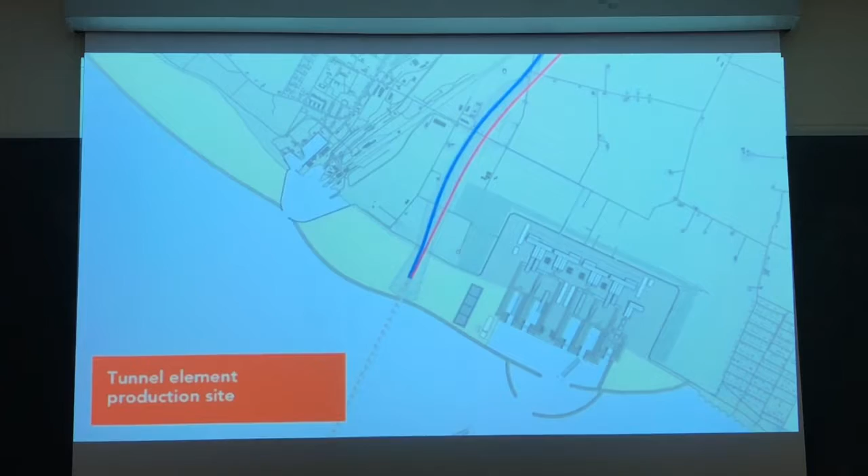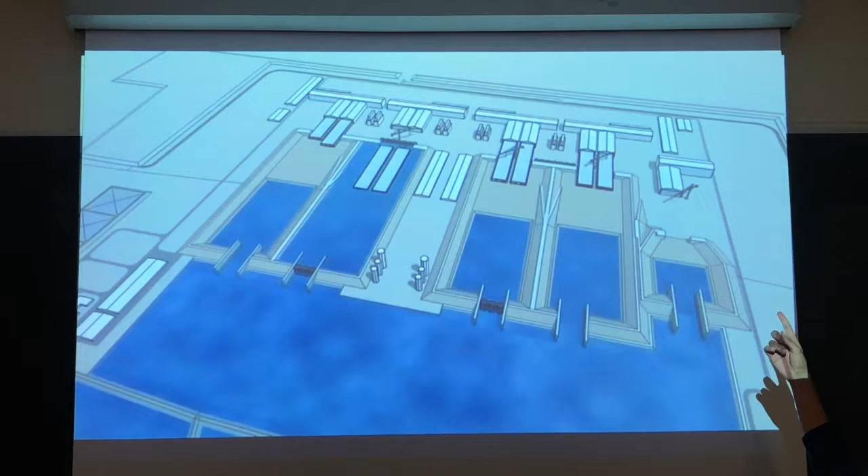My name is Michelle, and today we'll present the topic of immersed tunnel and floating bridge. Starting with the immersed tunnels, the tunnel elements will be produced in a factory near the project location. The animation you see on the screen shows the production site. It includes halls where the reinforced modulars will be prepared, as well as a production line for concrete casting, docks, and a working harbor. My friend Chi will walk you through the construction details.

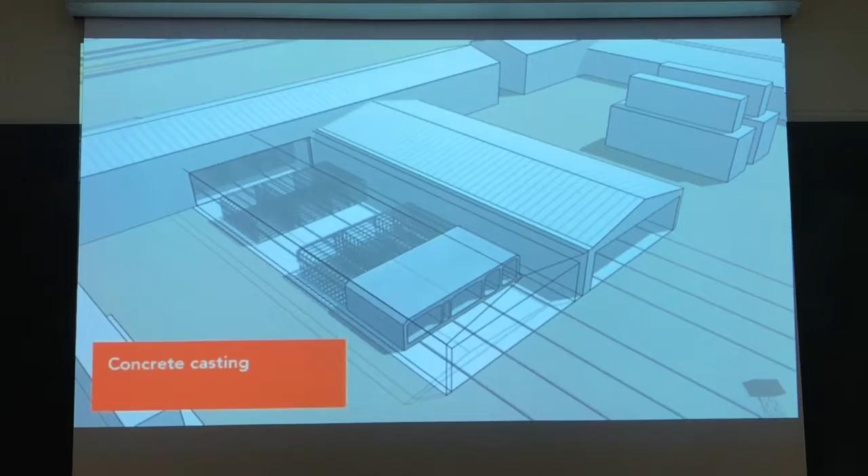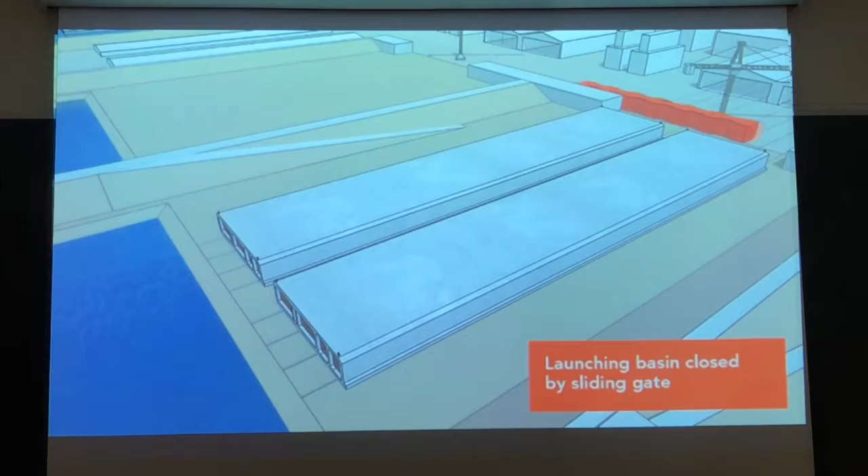Production will take place in a continuous process in which 9 identical segments will be joined together to create a complete element. All reinforcement work will undergo extensive quality controls before moving to the next station. The rebar cage will be skidded to the assembly area supported by both the lifting table and the launch scaffolding system. To prepare transport, watertight bulkheads are mounted.

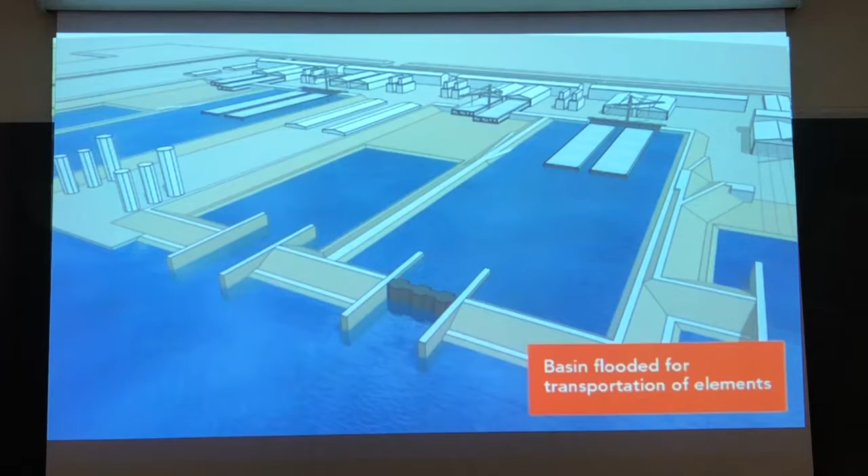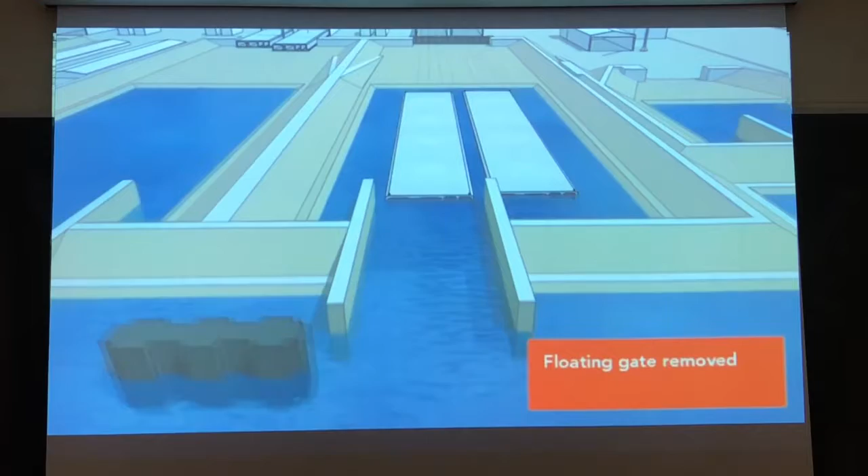After floating a trussed pontoon and closing all gates, the basin will be filled. After aligning the water level, the gate will be removed. Then, the element will be towed out underneath 2 immersion pontoons.

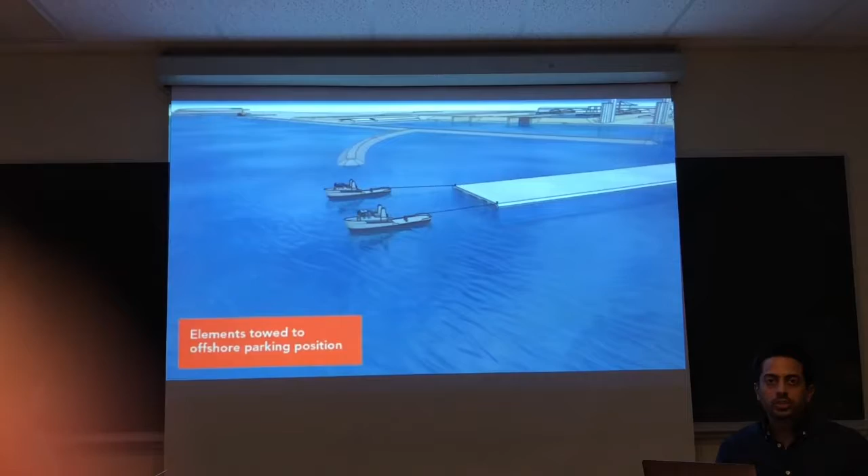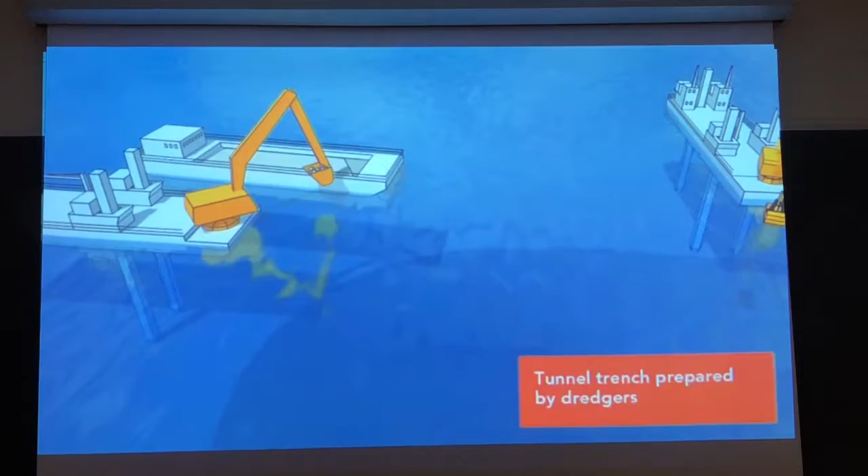So during the construction of the tunnel's elements, dredging will be carried out by specialized dredgers to ensure a precise and smooth base in the tunnel trench. Dredging is being selected to minimize sediment spill and to limit the impact on the surroundings and the environment. Dredged material will be transported on special barges to designated landfill areas.

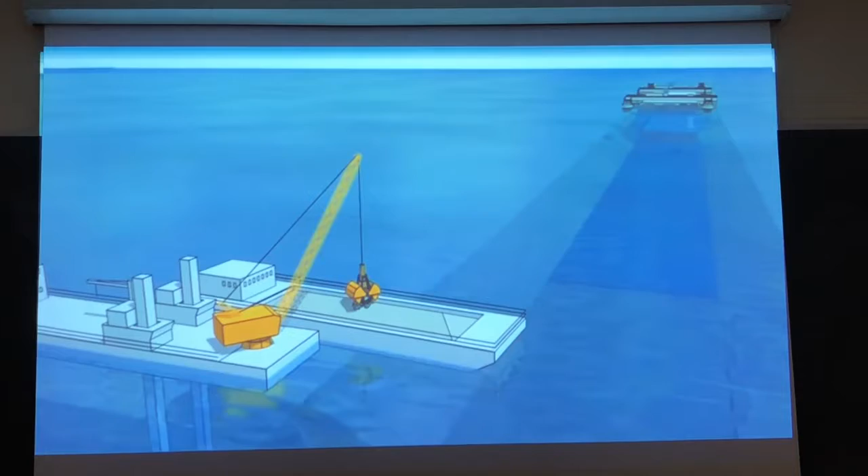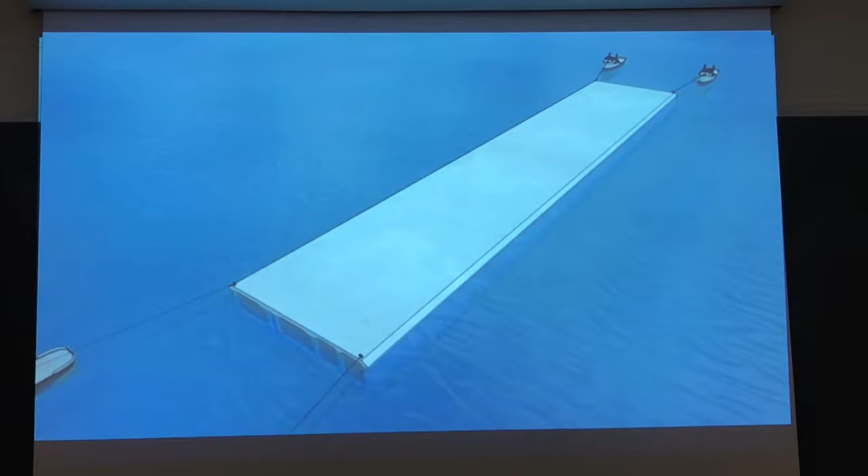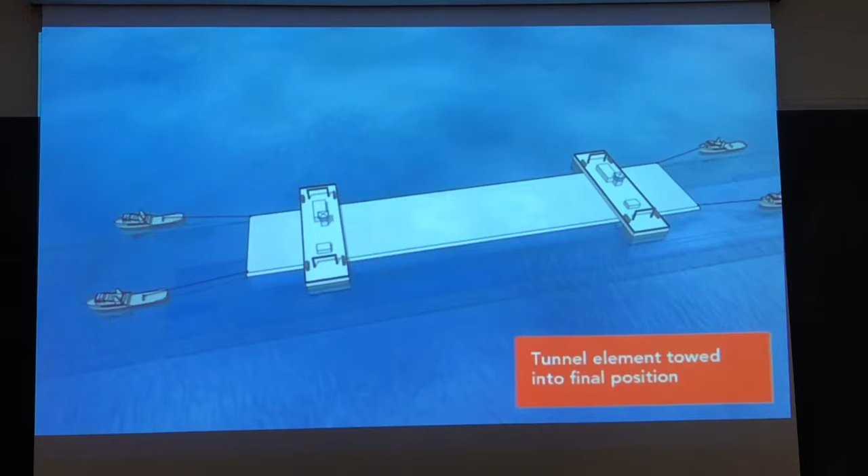After preparing the site, tunnel elements will be towed out to the project location where it will be immersed into its final position. When the element is positioned directly above the area where it will be immersed, it will be held in position by cables attached to temporary anchors in the seabed. It will then be immersed in a trench that has been excavated in advance while the elements were being constructed in the factory we showed in the beginning.

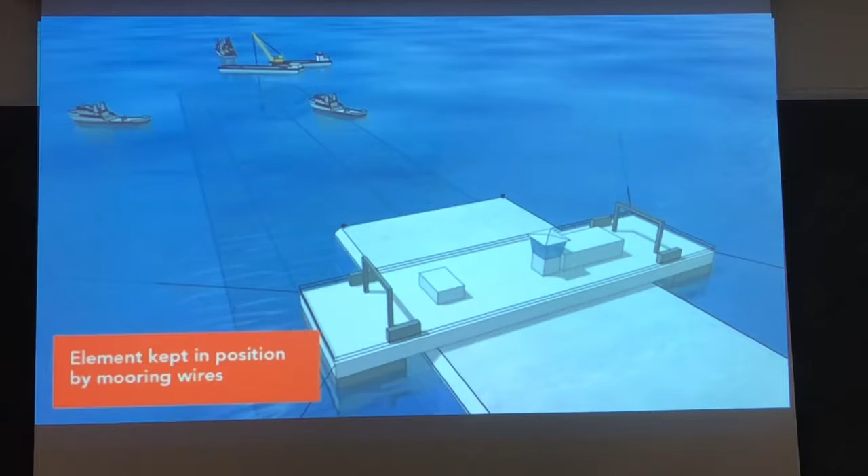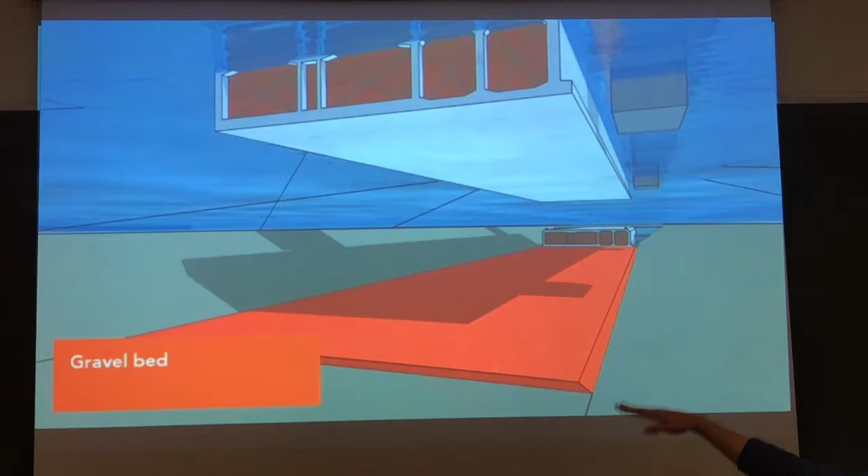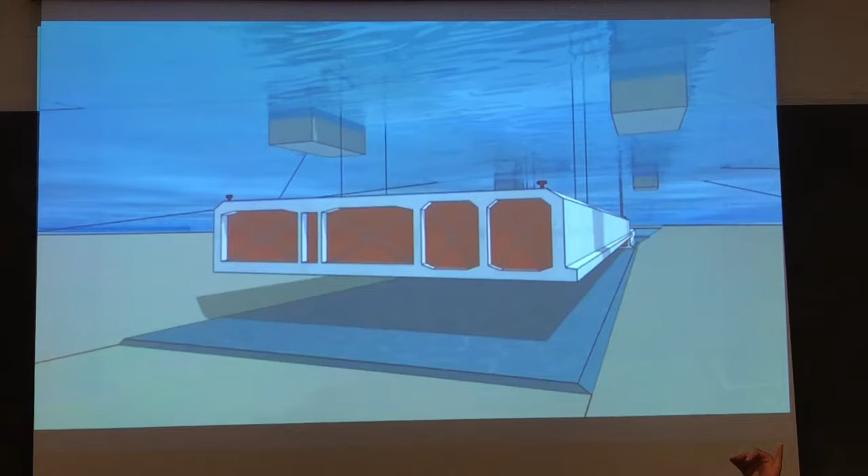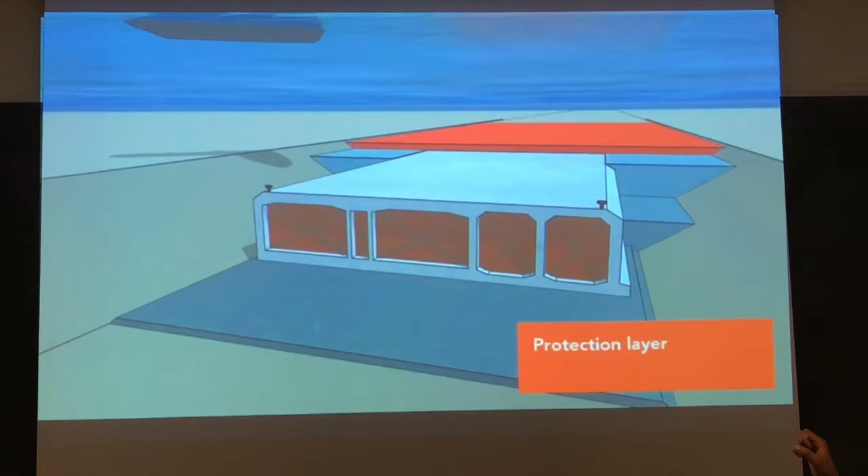As you can see on the screen, the tunnel element will be lowered onto a gravel bed foundation that has been previously laid in the tunnel trench. Ballast tanks that have been fitted to the element are gradually filled with water to sink it. As the element slowly sinks, its movements are controlled by what are called mooring wires. After that, both sides of the element will be filled with sand to keep it in position. And finally, a protective layer of stone will be placed on top to protect the tunnel's element.

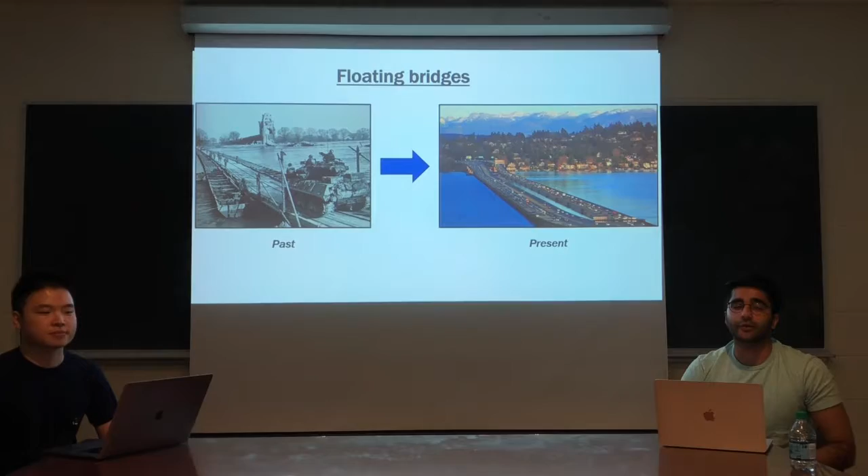Hi, I'm Najim Arfin, and the next topic that we're going to be discussing is floating bridges. Now, these are very unusual structures, as only 20 of them exist across the world, and their design varies greatly based on location and purpose. Early pontoon bridges were built during times of war to allow movement of weapons and soldiers, with civilizations as early as the Greeks, Romans, and Mongols all using their own versions of pontoons.

In today's age, they are massive structures of steel and concrete which can support the immense weight of commercial and commuter traffic, and they also prove to be far more effective than traditional bridges, but are unfeasible in areas with strong winds or waves. Pontoon bridges essentially utilize the concept of buoyancy, as the hollow pontoons support weight equivalent to the water they displace, which means that the larger the pontoon, the more traffic it could potentially support.

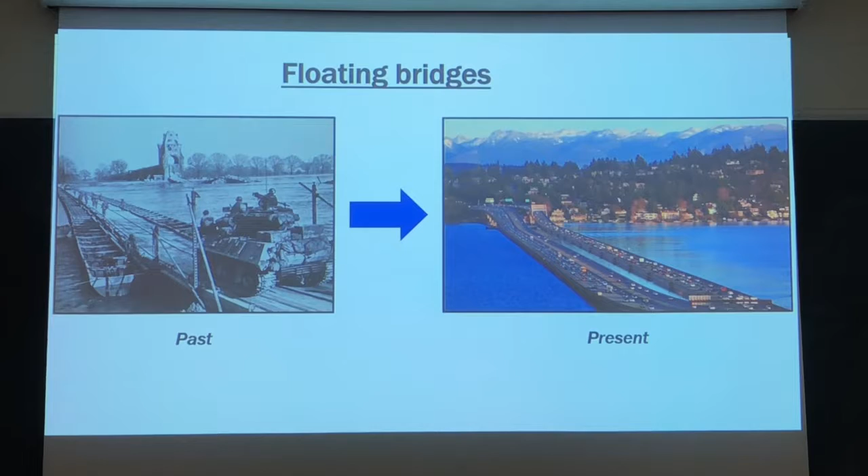Now, the bridges are either supported by continuous or separate pontoons, which means that it could either be one large stretch or multiple smaller pontoons to support the bridge. Pontoons are usually built near the construction site and towed into place by barges and are then anchored to keep them in place, whereas the support elements and deck are then added on top.

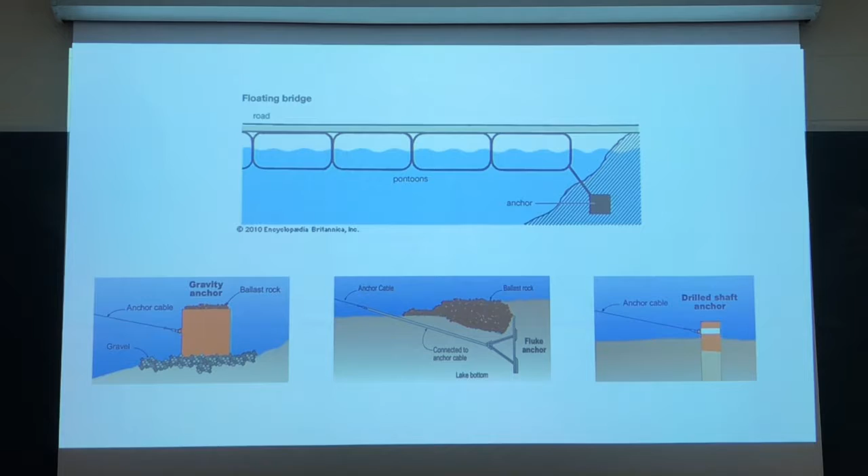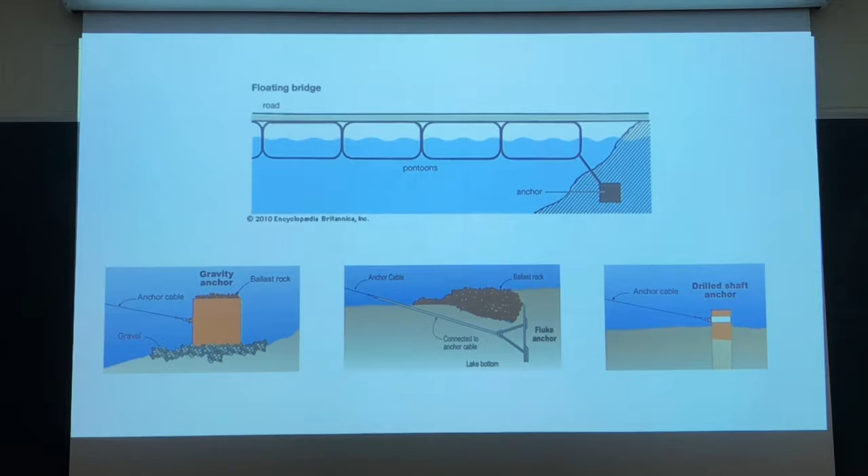To ensure the stability of the bridge, a combination of anchors and mooring lines are used. The anchors weigh a significant amount and allow the bridge to flex under stress without breaking. There are 3 types of anchors that exist, notably the gravity, fluke, and drilled shaft anchors. Now, another problem during construction of floating bridges is shorelines, which often cause problems due to jagged terrain and elevation, and engineers must design the bridge accordingly to ensure the safety of vehicles.

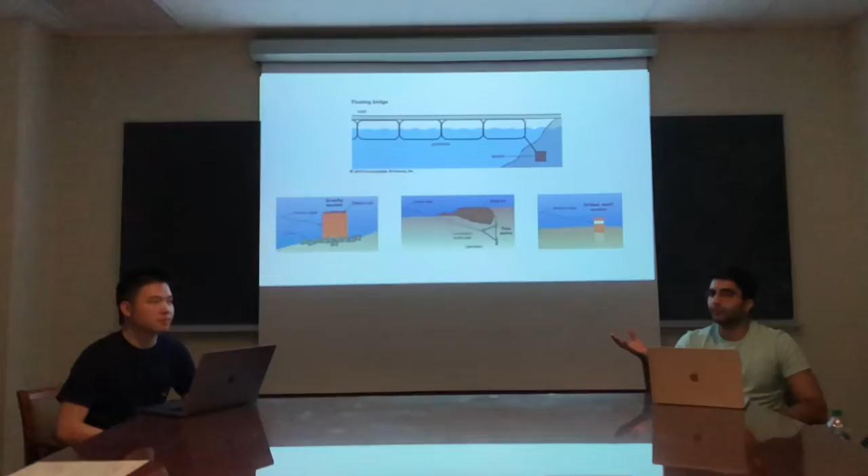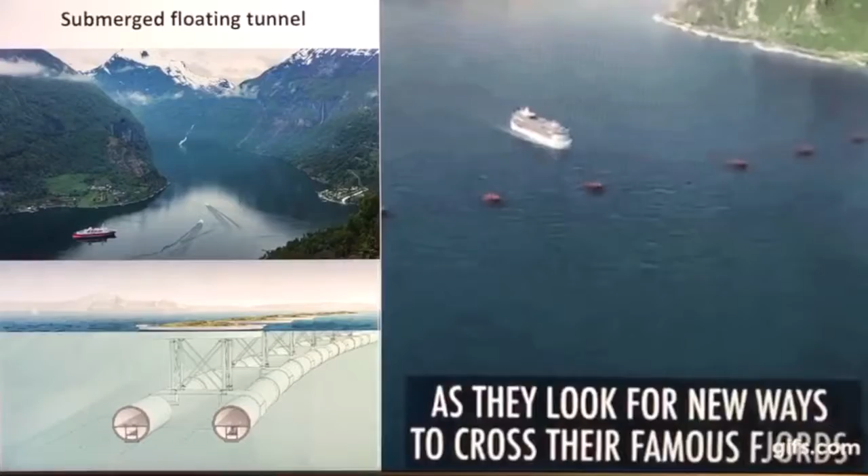And now Jin Hao will discuss submerged floating tunnels. In the end, we are talking about a concept tunnel, which is a submerged floating tunnel. Why we need to combine the floating bridge and the immersed tunnels is because the fjord can be up to a mile deep, so it's not practical to build a bridge over the waterway or the tunnel underneath. And the floating tunnel will not disturb any water traffic, and it's also good to deal with the seismic disturbances and the weather events. The structure performance is independent of the length.